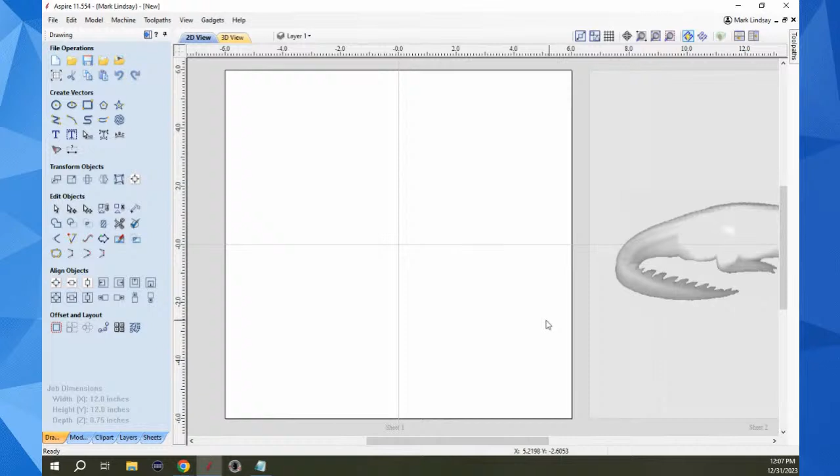I'm sure a lot of you who have done any kind of 3D work at all have already used a vector boundary when it comes to 3D.

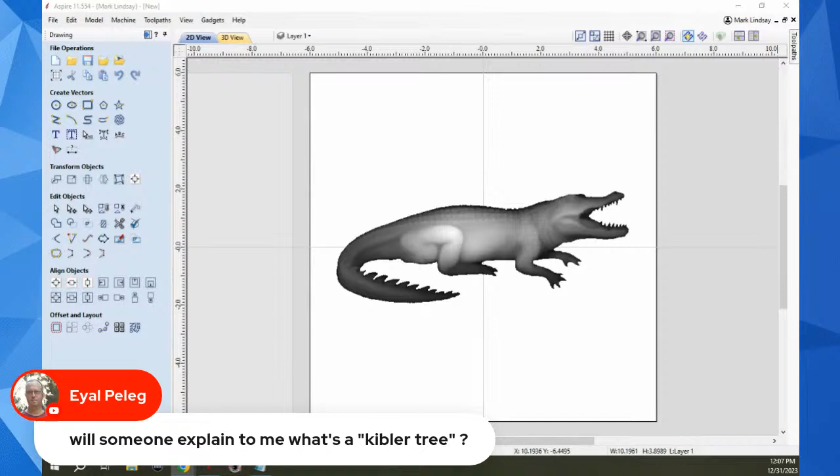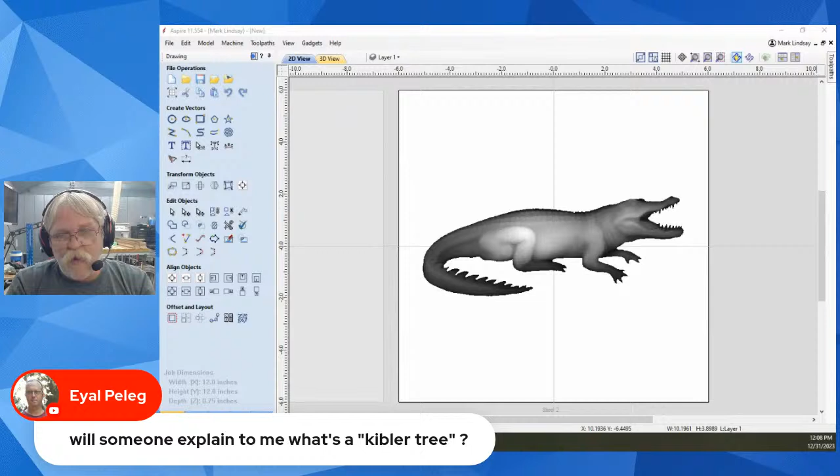Okay, let me stop for a second. Will someone explain to me what's a Keebler tree? Al, I sometimes forget we have people overseas or people not within the United States who aren't familiar with American slang. A Keebler tree - Keebler is a brand of baked goods here, cookies, donuts, crackers and things of that nature. The Keebler advertising is they're a bunch of elves who live in a hollow tree and bake all their goodies there, then put them out on the market for sale. Some of the emphasis in the Keebler elves is they're happy, friendly, efficient, and their stuff is good and good for you. How much of that is true, I don't know. But saying somebody runs a tidy little Keebler tree is using it as a euphemism for someone who runs a very tidy ship and is very competent and knows what they're doing.

I'll stop using that, but it is a fact. So, what can I say? Okay, into vector boundaries. Most times we use vector boundaries, and the only time I've ever seen them mentioned is when it comes to 3D projects like this. So I've got Wally the Gator out here in the middle of my material, and a vector boundary in this case is usually used to draw a vector all the way around the model to use as a machining limit. I only want to machine this, I don't want to machine anything out here.

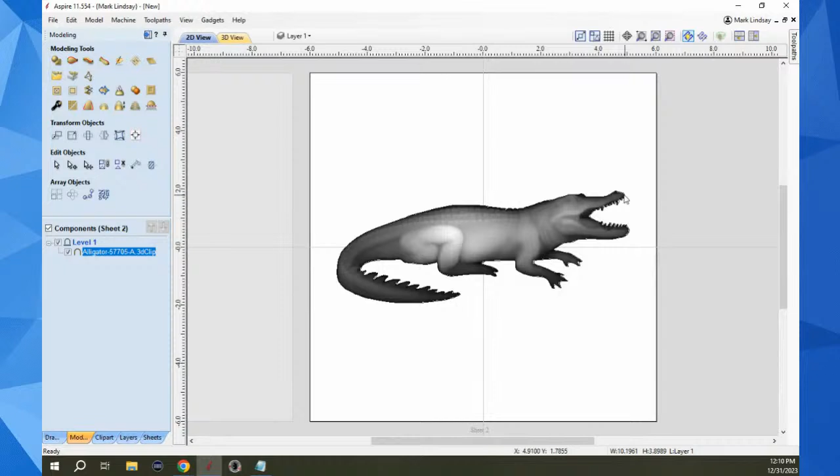And I don't want to add to the machining time by trying to machine the entire piece of material. So we'll go over to the modeling tab and make sure our model is selected. Then right here under modeling tools, we'll go down to the third row, fourth icon, and it says create a vector boundary around the selected component. I'll click that, and you'll notice a little bit of a jump over here. But what's actually happened is a vector has been drawn around that model.

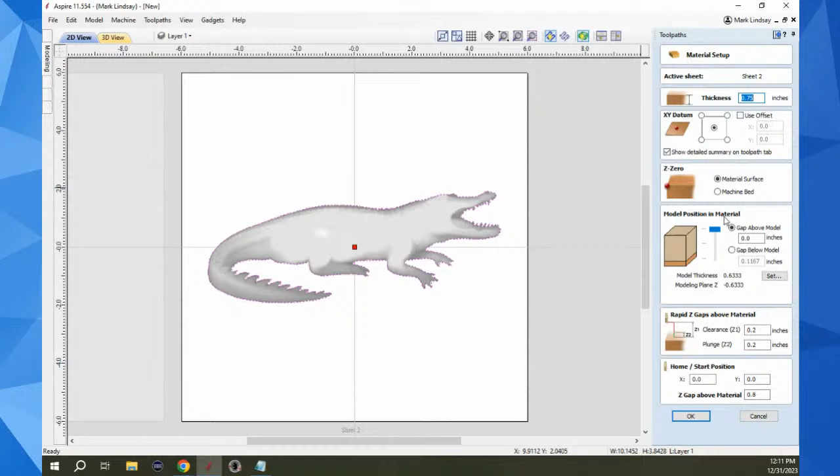And when we go over to calculate our roughing or finishing toolpath, we can set that. Let's go ahead and go over to 3D roughing. It's going to go into material setup - okay, all of that is good, all that's fine. When we go into our roughing toolpath, we'll machine to the selected vector and make sure that vector is selected. Then I'm not going to change anything else here, I'm just going to go ahead and take that as whatever it is.

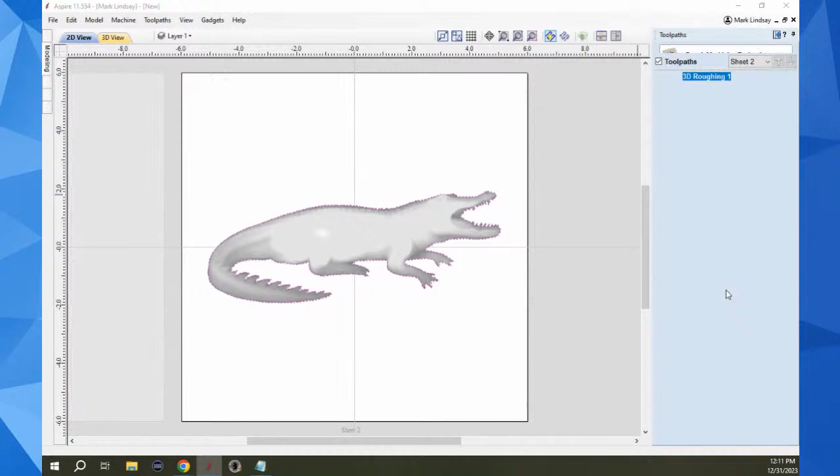And we can see that the only thing it's going to carve is right there around the model. It's not going to bother with anything out here. Now, I venture to say about 90% of you already knew this.

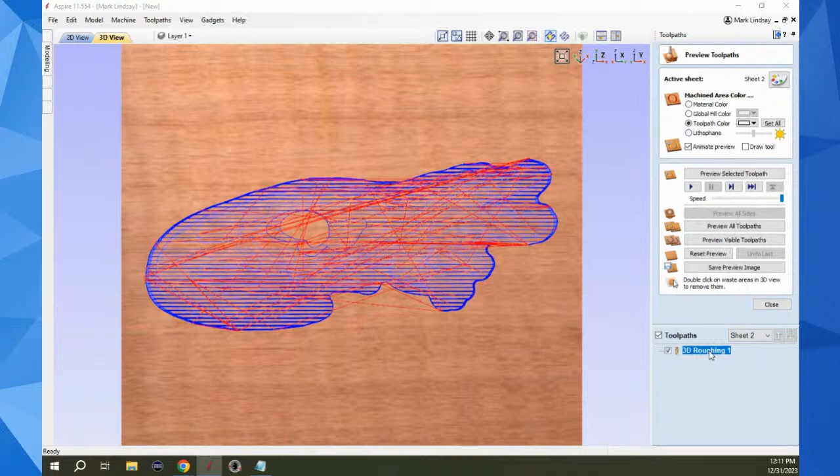But there are a few who might want to know that. Now, let's go back over here into, whoops, let me close this and uncheck that. Let's go back into the toolpath. We have several options here. We can do just the model boundary, meaning the entire alligator, but nothing else.

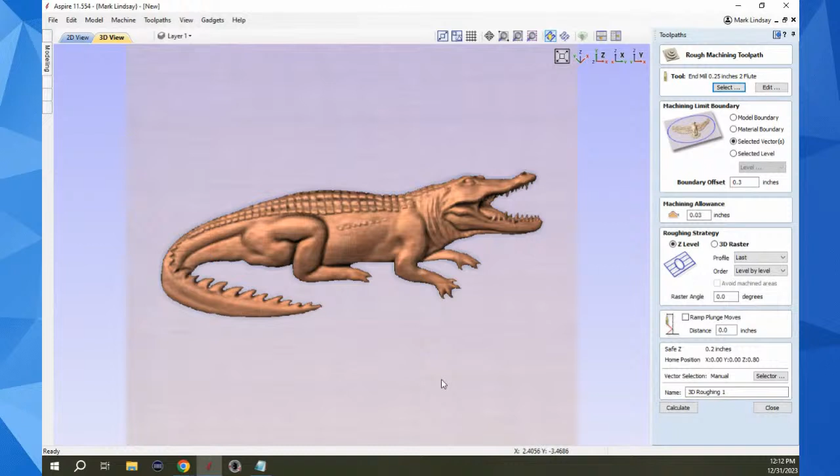But something to remember that a lot of folks forget is that if you have added a zero plane to your project, that zero plane is part of the model. And the zero plane is going to cover the entire surface of your material. Now, most commonly we'll use a zero plane if we're carving a dish.

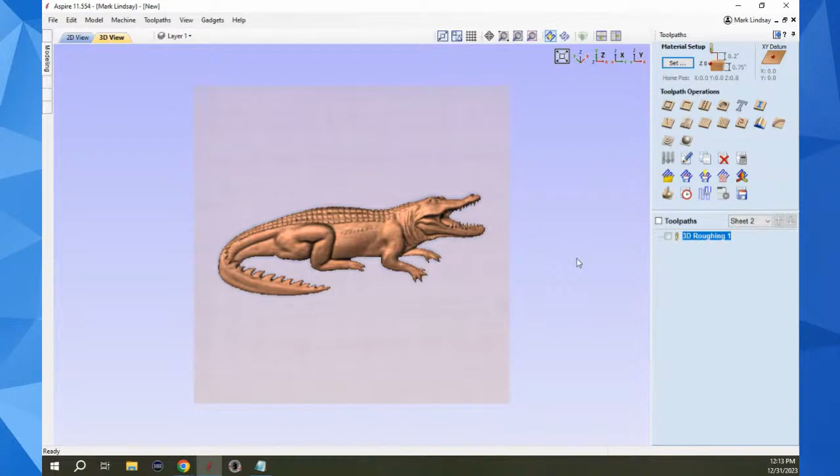So if you want to go ahead and carve all this here, you certainly can. You would just use the model boundary or the material boundary. But if you only want to carve this area right here, that's when you would use that selected vector. So vector boundaries around 3D objects are more or less pretty self-explanatory.

But something I have, and if you have any questions along the way, feel free to chime in and ask those questions. But something I have yet to see discussed really is over here in the drawing tab. If we come into edit objects, we go down to the third row, the fourth icon in, you can create a vector boundary around 2D vectors as well. And that's worthy of some exploration.

So let's say, for instance, you want to create a cover. You need to carve a cover to go over something. And you have holes that need to be drilled all the way through the material for some bolts or screws. And you need to draw that cover out. Now you've taken some measurements, and this is just an example. You know you need to do 1/4 inch holes or about 6 millimeter holes.

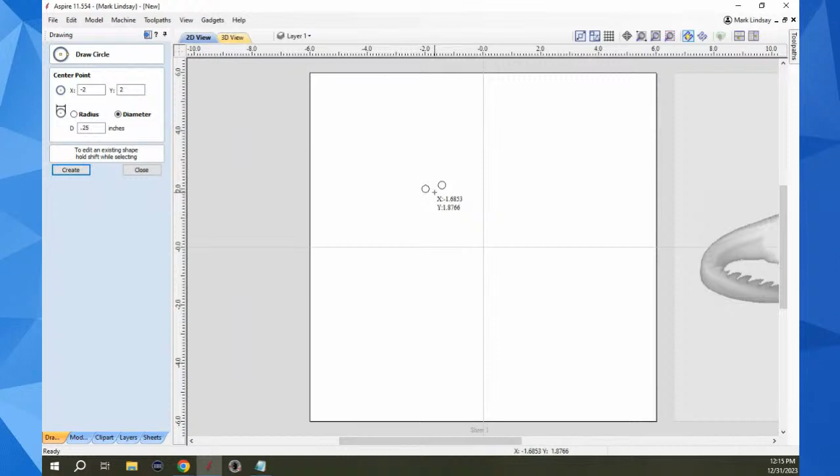Now we need another over here. The only thing that's going to change is I want it at +2 instead of -2. So I'm just putting the through holes in right now. And we'll go over there. All right. Well, if it's just a square cover panel that we're making, then this gets pretty easy.

We're going to go to -2 on my Y, +2 on X. That's going to put one down here. We'll create. Then I'll go to -2 over here. And that's going to put one on this corner over there. Create. Okay, pretty straightforward.

Now, we also need to counterbore. We want another circle around these that are 1/4 inch larger than these holes. We want to drop a washer down in there, and we need the heads of our bolts to be down below the surface of the material. Now, we could go in and draw bigger circles.

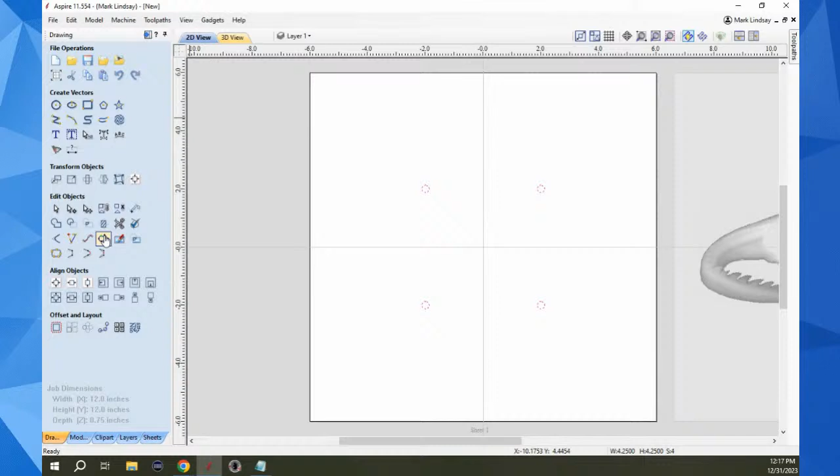We could go in and offset these, but there is another way, and that is we'll select all of our holes. Then we'll come over here to create a boundary vector around these selected vectors. So I'll click on that, and that opens up this form here, vector boundary. Now, what I want to do is an offset boundary around these circles. And I want it to be a total of 1/2 inch larger.

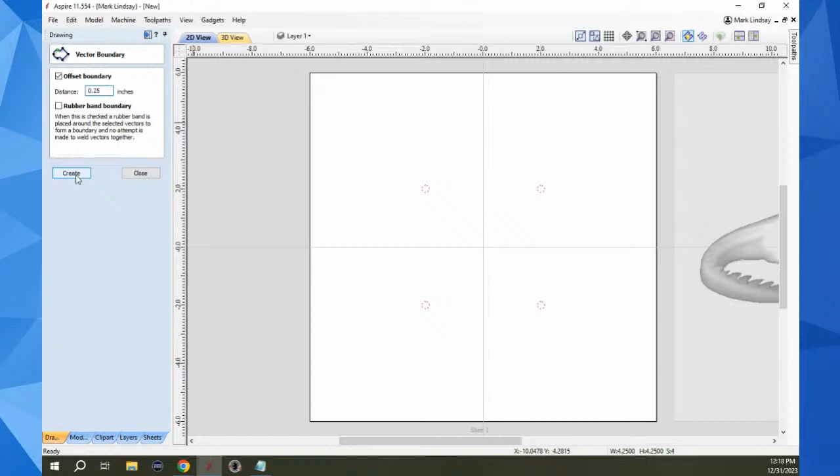Okay. So I'm going to go for a distance of 1/4 inch. And I put a second decimal in there, which Vectric does not like. And I'll go ahead and create an offset boundary around those 4 screw holes. Okay. Let me zoom in a little bit here, and I'm going to come to my measure tool. So I now have a counterbore, and I'll measure the distance from there to there, and we see that that is 1/4 inch larger all the way around. Okay.

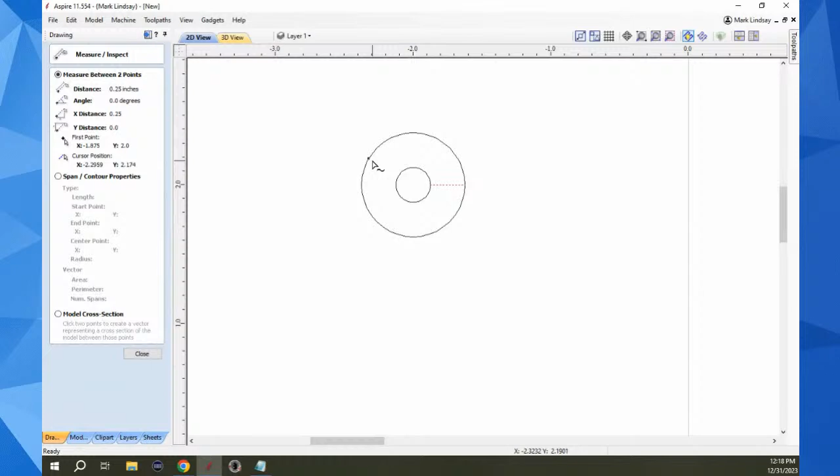Now, Bull is asking, what's the difference between a boundary offset and the offset tool, or is there? Well, I'm getting ready to show you. Okay. I'll show you the main difference, because yes, you're absolutely right. You could simply choose these 4 circles and offset them individually. Here's where the cool part comes in.

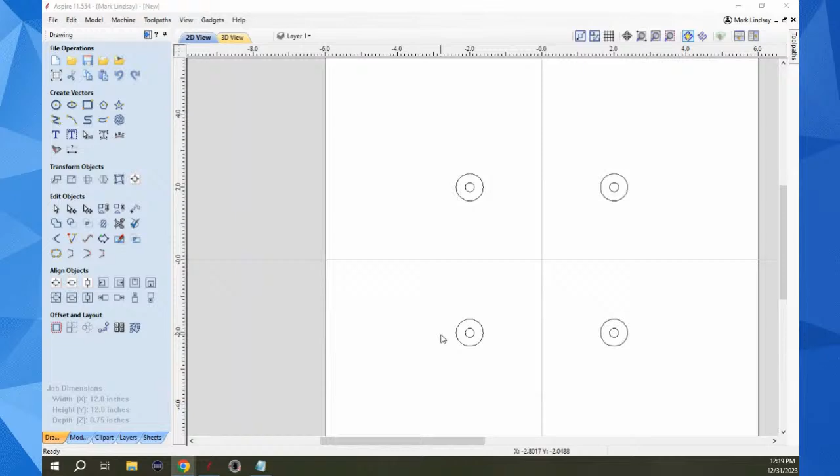So now for the size of your panel, the panel itself, you need it to be 1/4 inch larger than the outside of these 4 circles here. You need a 1/4 inch border, and you want to draw a vector around the outside, and you want rounded corners that kind of matches this radius. So what you'll do is you'll select these here, and I'm just holding down Shift and selecting each one. We'll go back up here to draw a vector boundary around the selected vectors.

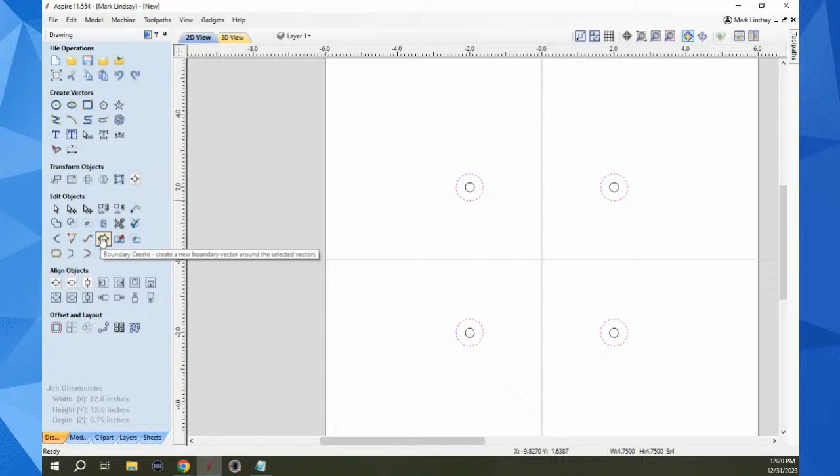Now we still want an offset boundary. We still want a distance of 1/4 of an inch, but we want to draw a rubber band boundary around all 4 of these. And what that does is that will draw a vector around all 4 of these using the same radius, and it will make no attempt to weld these vectors together. It's not going to try to follow contours or anything. So if I go create, I now have my cover plate.

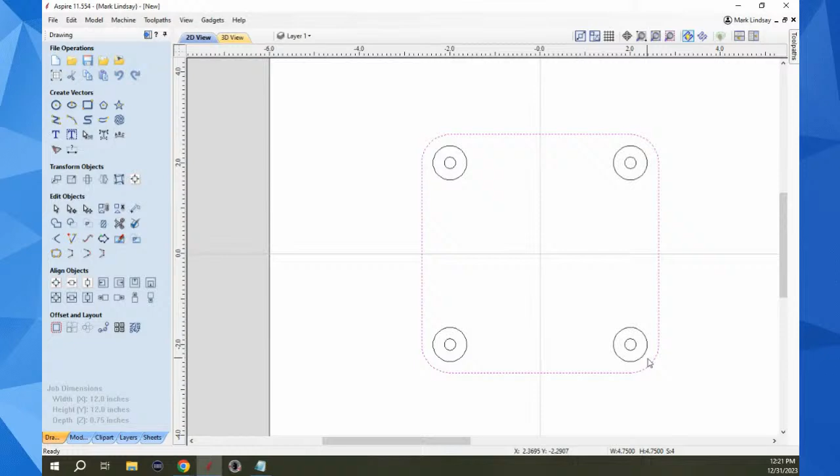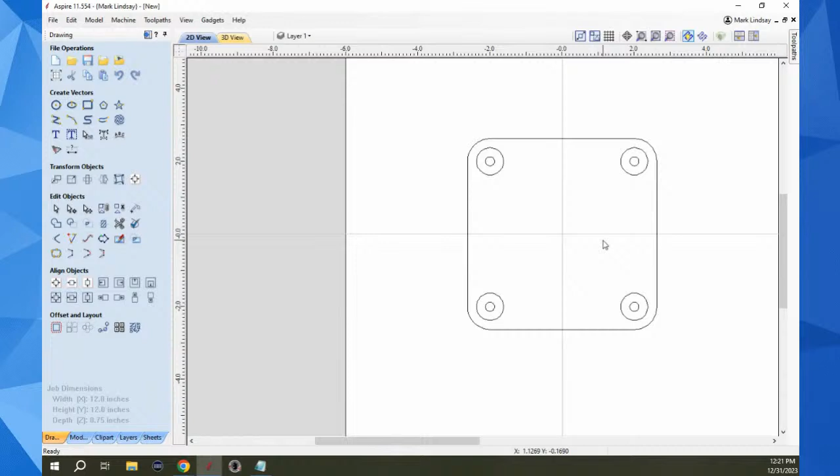The distance here to here is that 1/4 inch. Same here, same here, same here. Grab my measuring tool. Let's get in and let's make sure about this. And I'll just start right here, go to right here, and my distance is 1/4 of an inch. Okay. So let me undo that. Let me Control Z. I'll undo that.

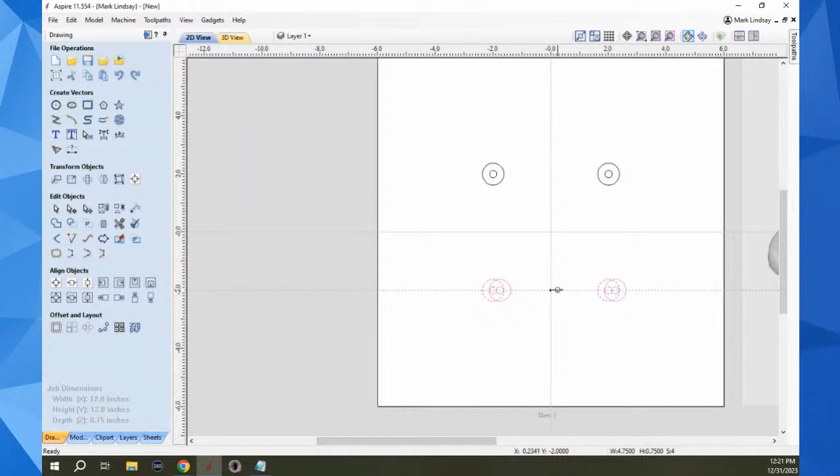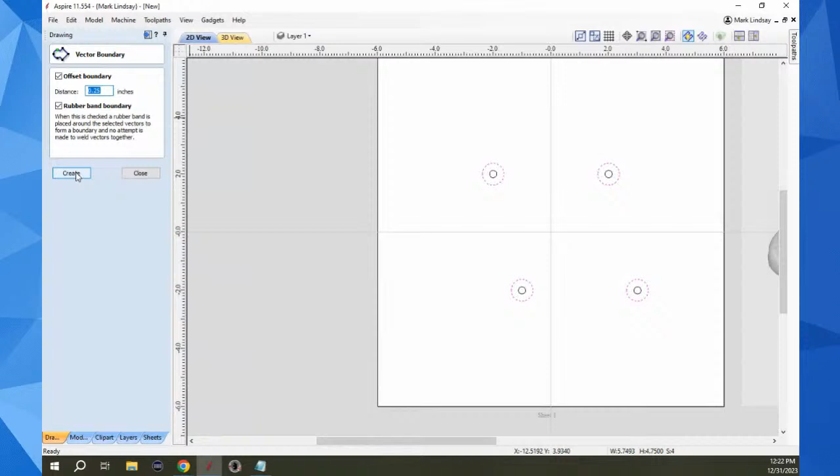And let's just say, for purposes of discussion, that we don't want a perfect square. That these two right here should actually be an inch over. So I'll go into Move Transform mode and I'll drag them over an inch. Now I'll select these outsides here. Again, Shift. This is just one example of how this can be used. Come back up to do a vector boundary. Again, I want an offset boundary of 1/4 of an inch, and I want a rubber band boundary. Then I'll create that vector boundary, and there is my cover plate.

Then I quickly discover that there's a bolt hole supposed to be down here. Well, oopsie. Let me select this bolt hole, put it into Move and Transform mode. I'll hold down the Control key, and I'll drag a copy. Let's base it off of the center on this one, and we'll put it right about there. And I'll delete that boundary. So now I've got this weird looking pattern that I need.

I can still go back in here, and then I can start getting creative with it. I can still do a rubber band boundary and create that cover panel. There are all kinds of options. There are so many different permutations. I don't like this diagonal line. I'm going to fix that. So I'll Control Z to undo that.

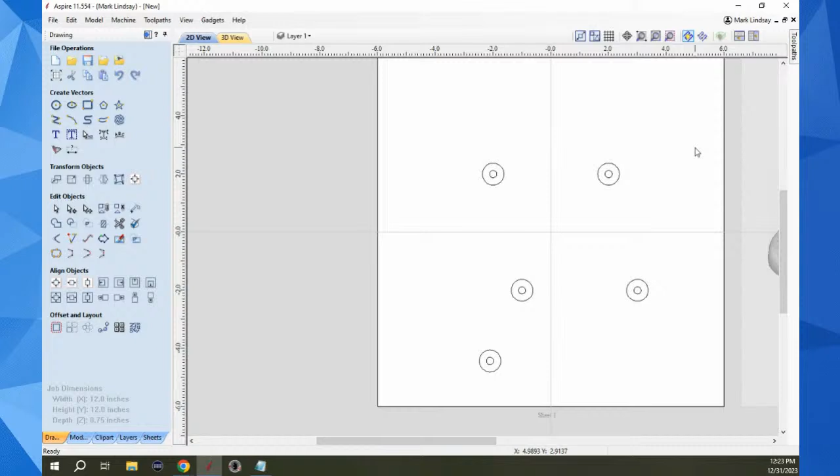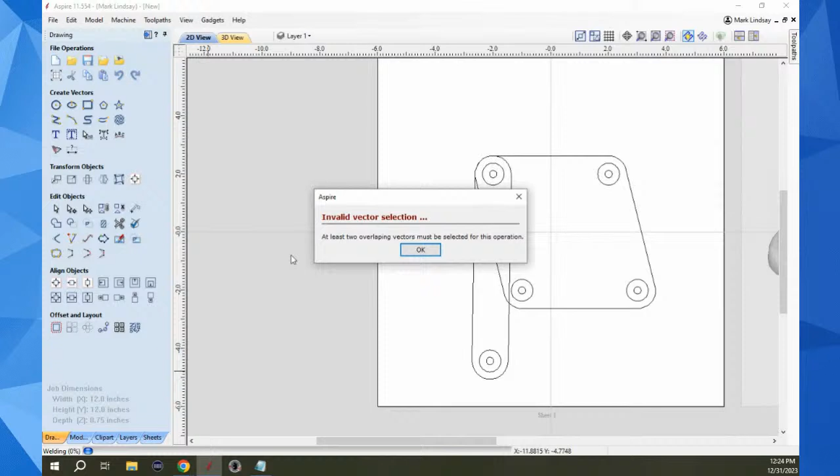And what I'll do instead is I'm going to just select those 4, do a rubber band boundary around those, create, okay. Then I'm going to select these and do another rubber band boundary around those, close. Now I'll select these 2 and weld them together. Fillet, oh, nope, wrong one. I chose the fillet tool. There's weld. I got to select the vectors, Mark. All right, let's weld those. Let's try this a 3rd time. Boom.

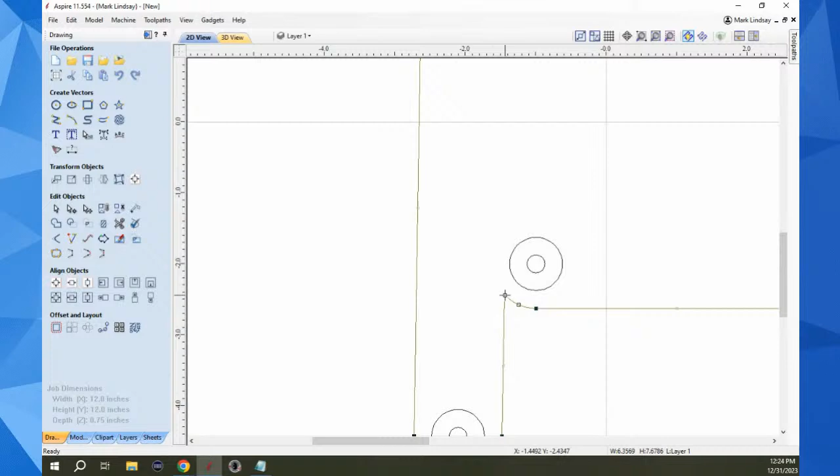Okay. Well, that looks a little strange. I got this little cutout here, but I can fix that. I can go into node editing. Now, first let's make this a line. There we go. Now I can drag this down to where that's 90 degrees right there, delete that point because I no longer need it. Come out of node editing. Now I can do a fillet. And boom, there we go.

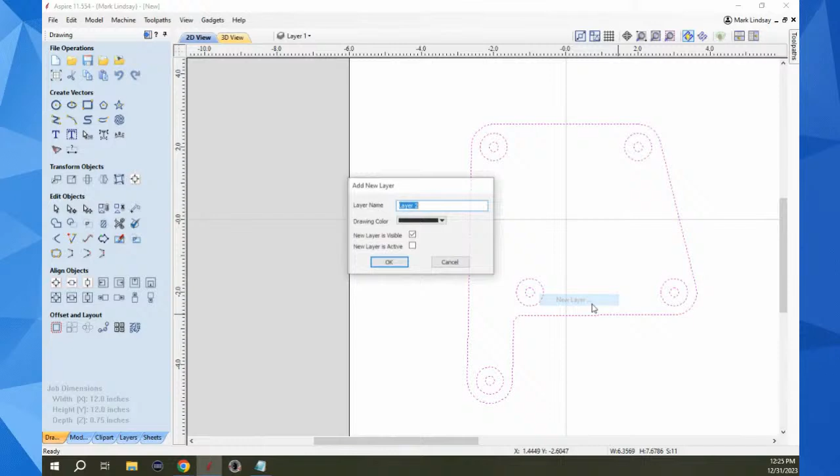There are all kinds of examples where doing something like this will work out. There are all kinds of situations where something like this could be used. Let me go ahead and select this, put it on a new layer. And I'll keep layer 2, and I don't want it visible. There, it's not restricted to closed vectors. It can be done in many different ways.

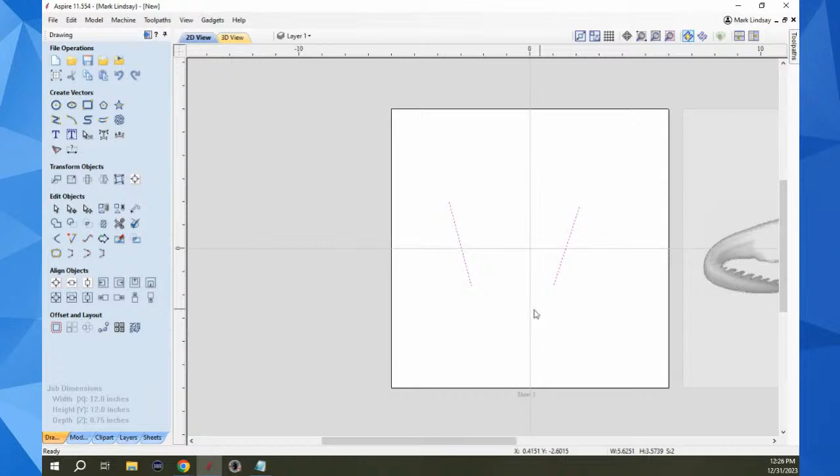Let's say you have a line here, and we have a line here. Now, these angles aren't anything special, they're just a couple of arbitrary angles. But now I want to draw a vector boundary around that. I can come back over here for the vector boundary, and I can turn off rubber band, and I can create a closed vector around those two open vectors.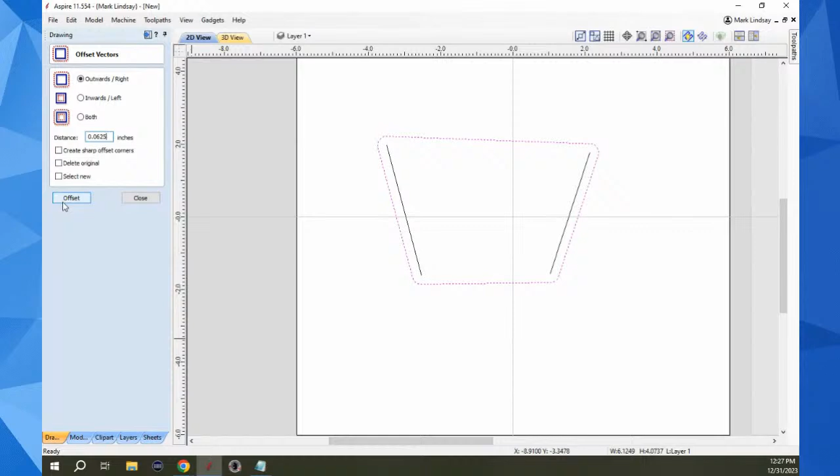Or, Control Z, I can do a rubber band boundary around just those two vectors right there. And there's my shape. And that can be offset and used for V-carving. I can offset that. Let's go ahead and do that. I'll offset it outward. Let's go with a 1/16 of an inch and offset that outwards. And there are two vectors that I can V-carve in between.

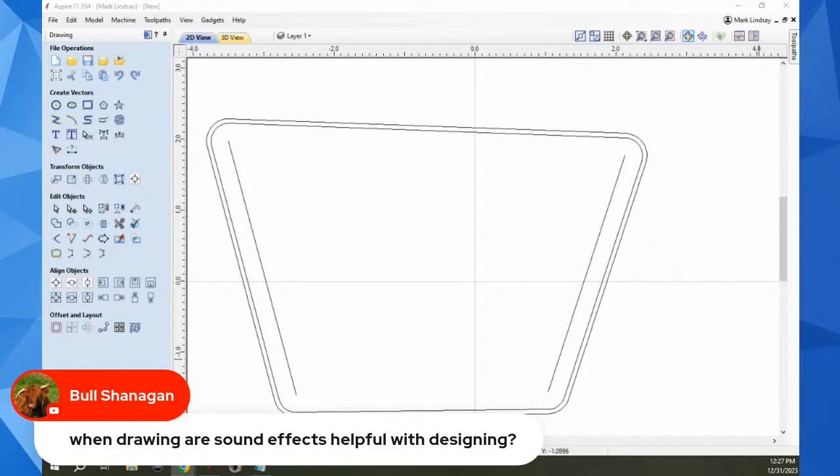Now, when drawing, are sound effects helpful with designing? I find they are for me. I sound like a pinball machine or a popcorn popper while I'm designing and drawing. Bada boom, bada bing, pow pow, bang, whatever. The important thing is you have fun.

And you can get all kinds of different shapes and designs and sizes when you're doing this. It's a cliche to say it, but the limit is your imagination. Now, it's not applicable in every case. Sometimes, for instance, that cover that I was just talking about, maybe the outline of that cover is the most important thing. And then you have to come back in with all the various measurements.

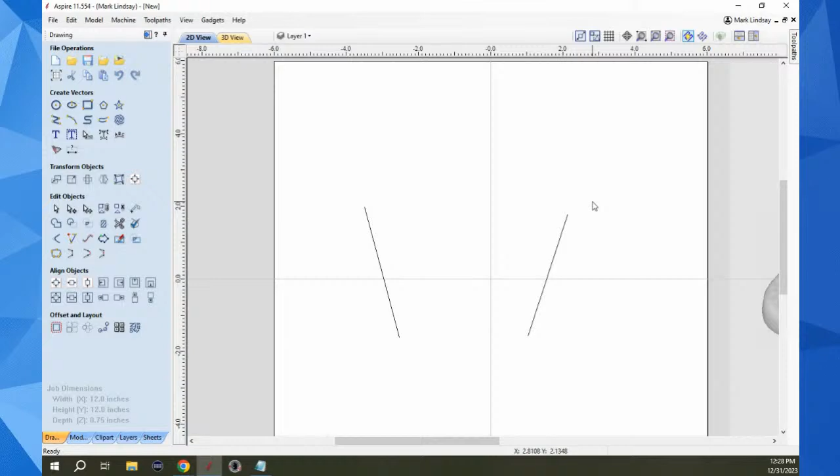But if you're creating a project and certain elements are the focal points or the features of that project, like these, it's more important that these through holes and these recesses be in these places, and the outline shape doesn't really matter. Well, then it's a viable option. So we would take this over.

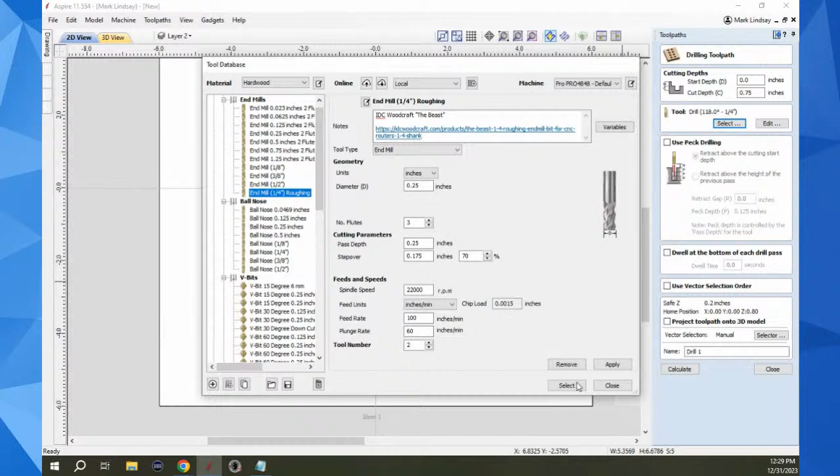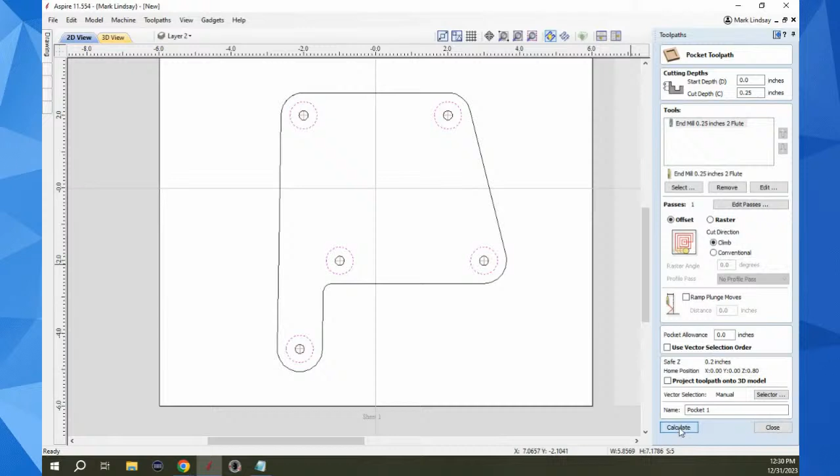Now I'll select the outside vectors. I probably should have grouped these so I would only have to select one, but what fun would that be? And now for this pocket, let's go with a 1/4 of an inch. That's fine. About 6 millimeters roughly. I want to remove that bit because it's just not necessary. And I'm going to offset these because it is a round vector. And we'll calculate those. And I'm not going to preview just yet.

I'll go over here and select this. For that, I'll do a profile toolpath. I'm going to cut all the way through the material. I'm going to edit passes for purpose of this demonstration. I'll do it in one pass. I would not do that, but for this demonstration, we don't want to watch a bit go round in a circle. There we go. And this is good enough. I won't add tabs for purposes of this demonstration.

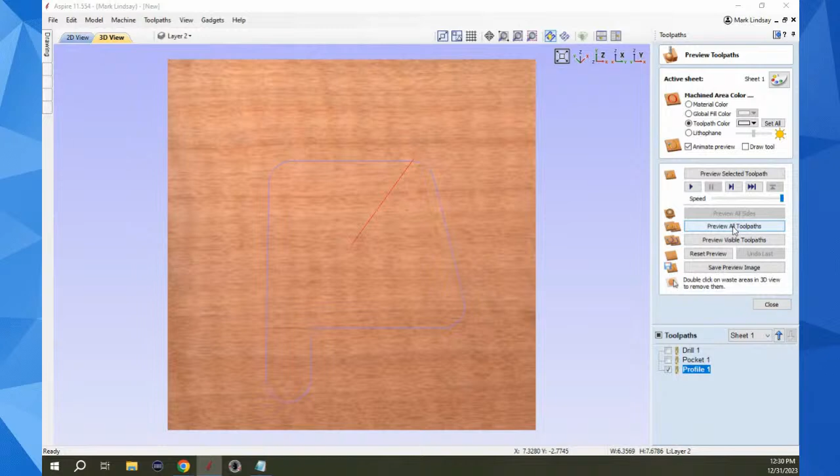Calculate, and now when I preview all of the toolpaths, get rid of the waste, we see I've got my little cover panel with the through holes, with the counterbore that's going to recess that washer and that bolt head, and then my profile cutout is self-explanatory. But it literally takes longer to explain this than it does to actually do it.

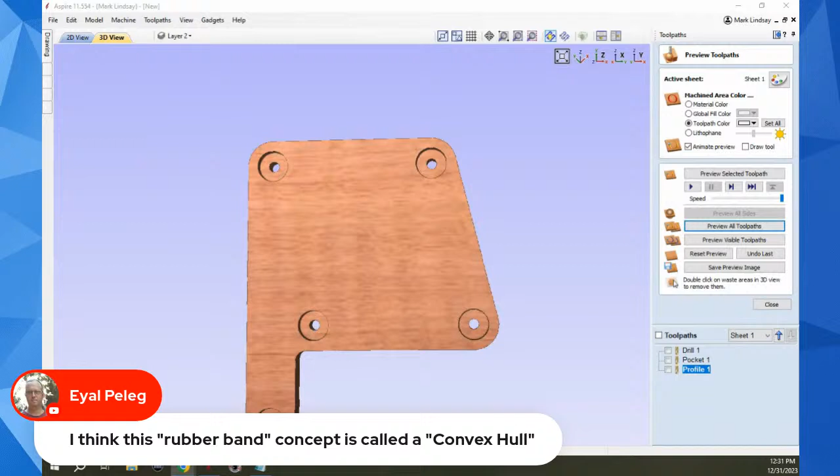Eyal says, I think this rubber band concept is called a convex hull. It may be. I'm not really familiar with a convex hull, but okay, I learned it when I was modeling using OpenSCAD. Okay, all right, yeah. I hesitate to say that there's no standardization in terms because we all know that there is, but some of these terms are regional.

Woodworking is pretty universal, and I'm just speaking about general woodworking now. But you have, for instance, the difference between a rabbet here in the US and a rebate in other English speaking countries. Then we call it a planer and you call it a thicknesser. We call it a jointer and you call it a planer. Both, I think, are correct and both make perfect sense. It's just a regional difference in the language.

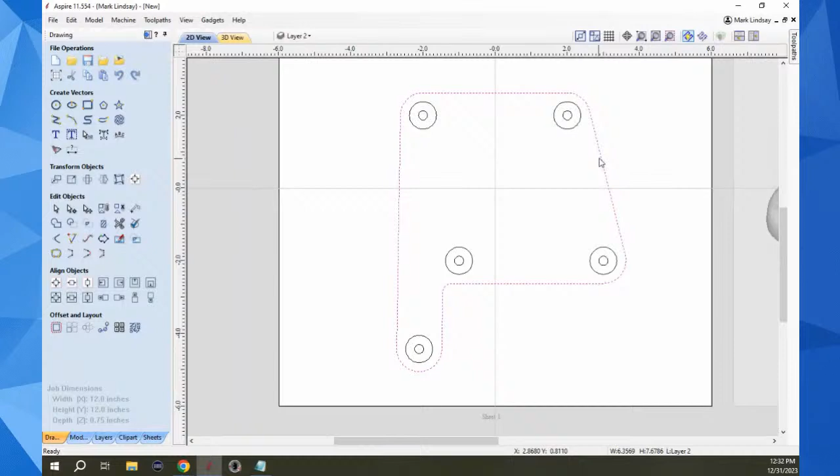I'm sitting here gesticulating with my hands as if you could see. But basically, the rubber band nickname comes from it following the trajectory of whatever it is you're trying to surround, whatever you're trying to offset. But it's maintaining that distance, that offset amount that you entered, that offset boundary, it's maintaining that distance.

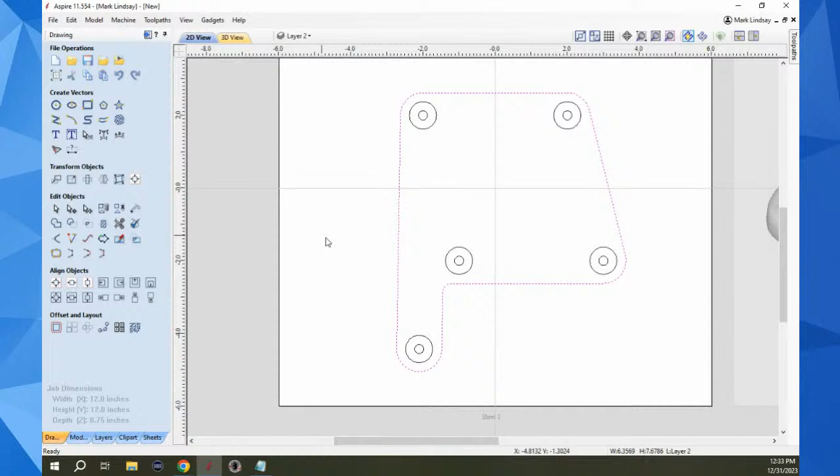So now, yes, it would be very easy to do the math and say, okay, I want it to be a 1/4 inch away over here. I want it to be a 1/4 inch away over here. I could make this out of 2 rectangles. I could make it out of 1 and just add a bunch of nodes. Or you could just select them all, do some welding, do a little bit of node editing and be finished with it. It eliminates a lot of math that maybe you don't need.

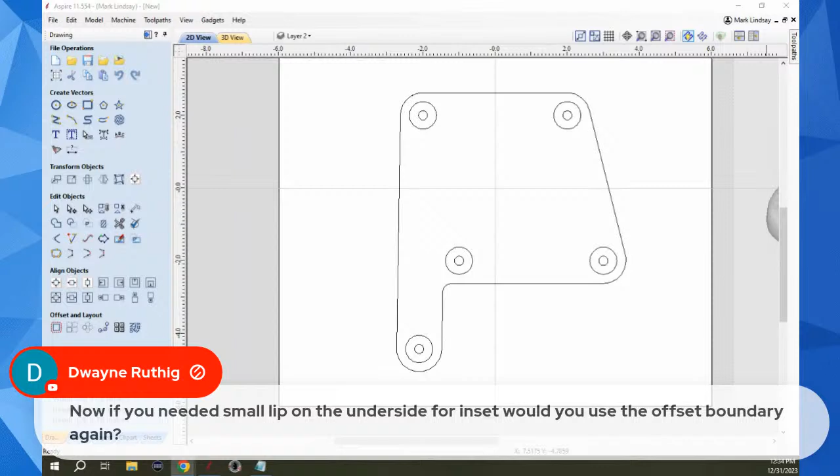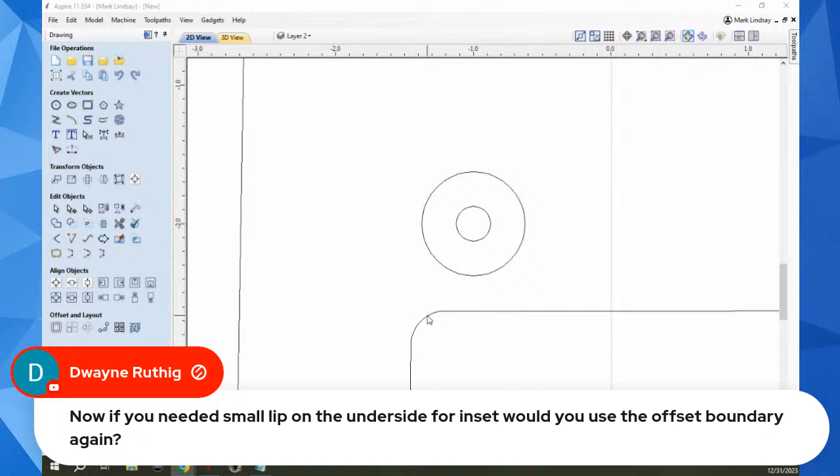Let's see. And now Dwayne says, now if you needed a small lip on the underside for inset, would you use the offset boundary again? You certainly could. Are you talking about a small lip inside? Or are you talking about, oops, I'm pointing at the wrong screen here. Are you talking about inside of the profile or are you talking about one of these counter bores? Because both of them could be done.

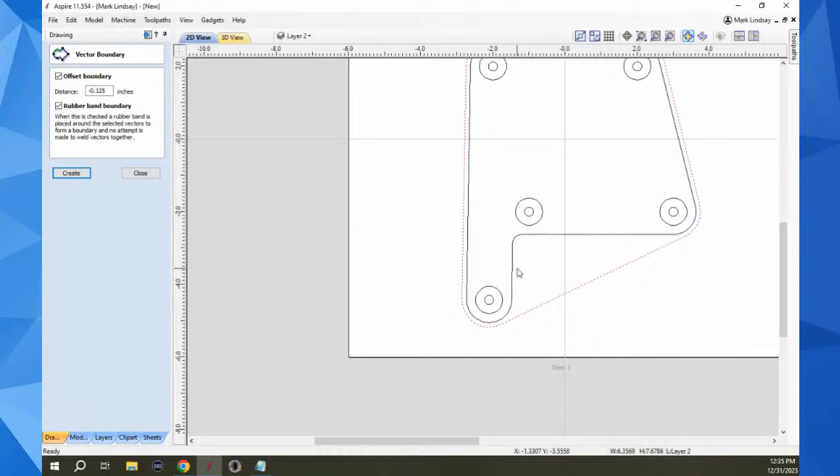You could, let's see, select this, do a boundary offset, and let's say I wanted to come in 1/8 of an inch. I could come in 125 and we'll make that negative 125, a rubber band boundary. And because I made the modification to it, it didn't follow this contour. This is a time where using, let's close and Control Z this, if you needed that offset inwards, you would want to use this offset.

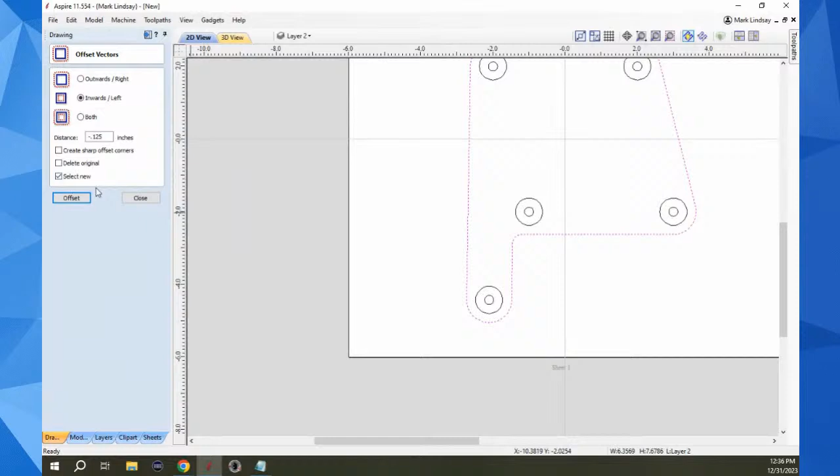Okay, you would want to go inwards, negative 0.125, because, and Bull, as part of your question, this is where the offset would follow this contour, where the rubber band border would not, or vector boundary would not. So I don't think we have any sharp corners. Don't need to delete the original. We'll go ahead and select new, and we're doing an offset. There we go.

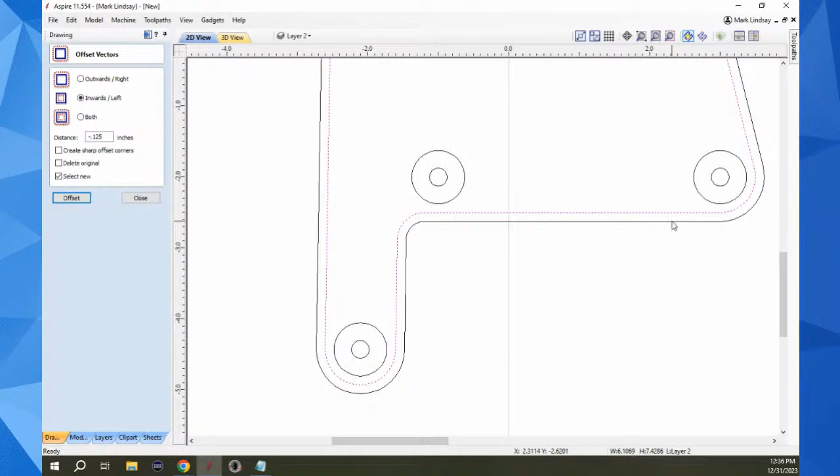So now you could use these two. You could either pocket that or do another profile cut here with, let's say, a 1/8 inch deep profile. So the rubber band offset boundary here will not follow the contours of this profile. It will simply draw a vector all the way around.

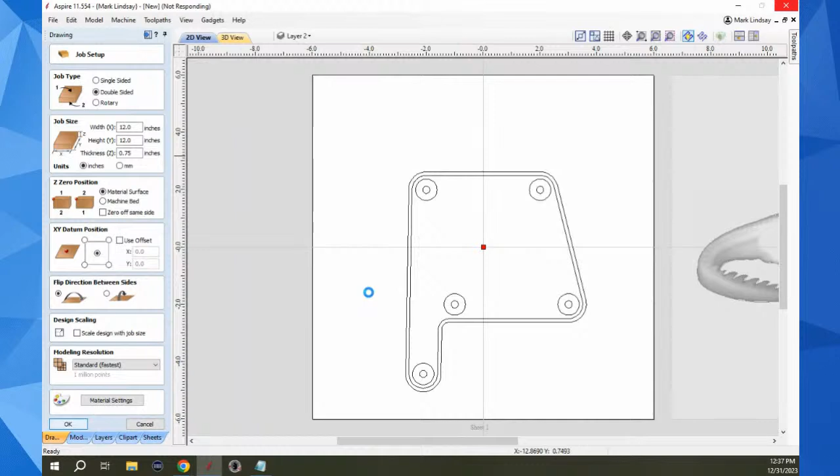So, okay, undercut on a two-sided project. All right. What you could do for that, well, there you go. You've drawn this. I would do this as well. I would probably copy both of these. I don't have a double-sided project in my job setup. So let's make this double-sided. Okay. I say okay. The computer is, there we go. All right. I would probably select both of these and copy to other side. That way you have them there on the bottom. Then you could do your undercut.

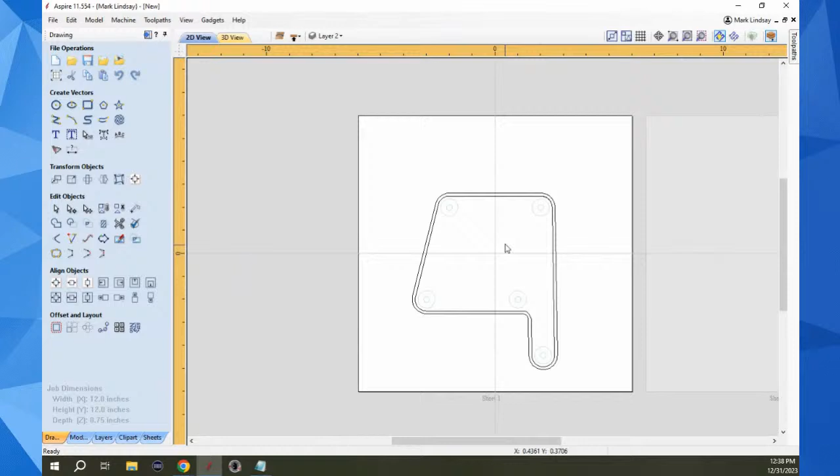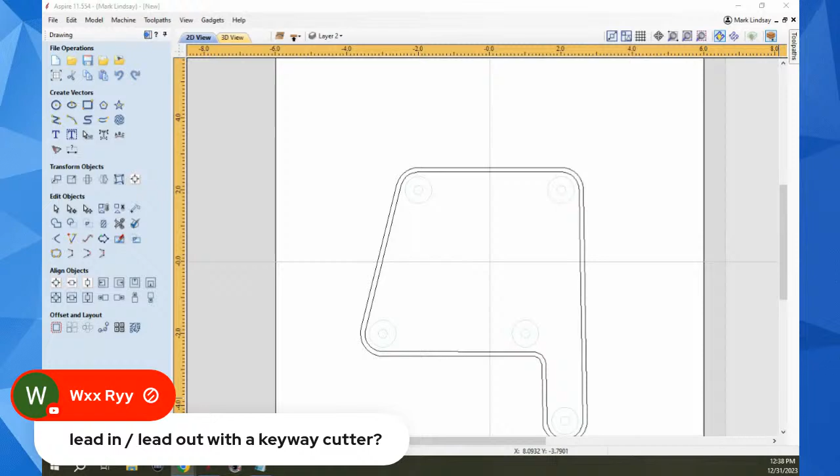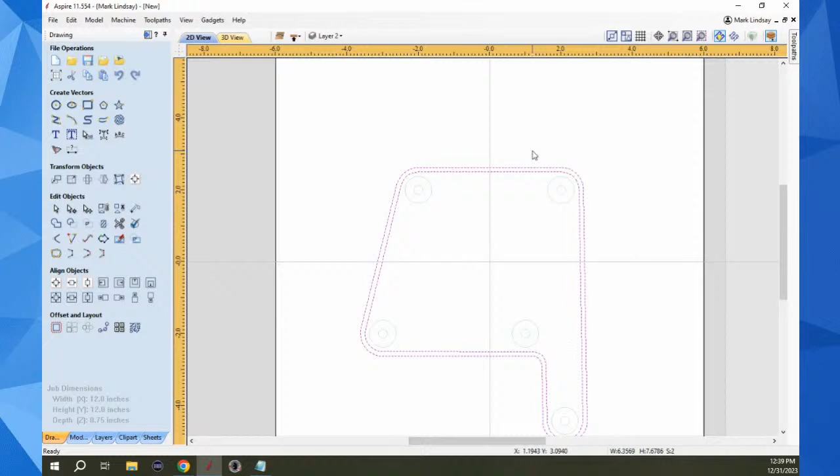And personally, on a two-sided project, I tend to do my outside profile on the bottom. So, yes, Wendell, you could do a lead in and lead out with a keyway cutter, and that would make it a single-sided project. You could do that. Depending upon the thickness of the material, you could probably get away with doing that with a keyhole bit. But again, depending upon the thickness of the material and your keyhole bit. But yeah, on a two-sided project, I would probably do these two machining operations last on the bottom side.

You know, to your point, Wendell, you could do the keyway cutter, but for example, if you had artwork or something else that needed to be put here, you could do this in conjunction with all that other artwork. Say you wanted to put your logo on the inside of this, you could carve your logo in this, swap out for an end mill, then cut your recess here, your undercut, then do your profile. So yeah, there are many, many options.

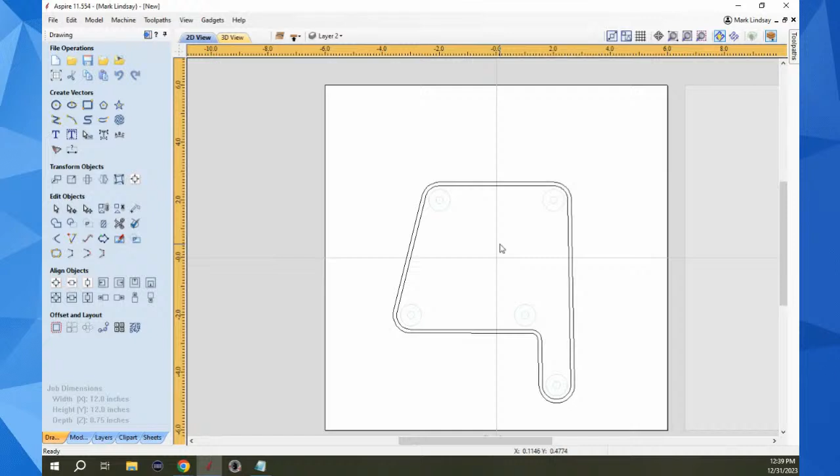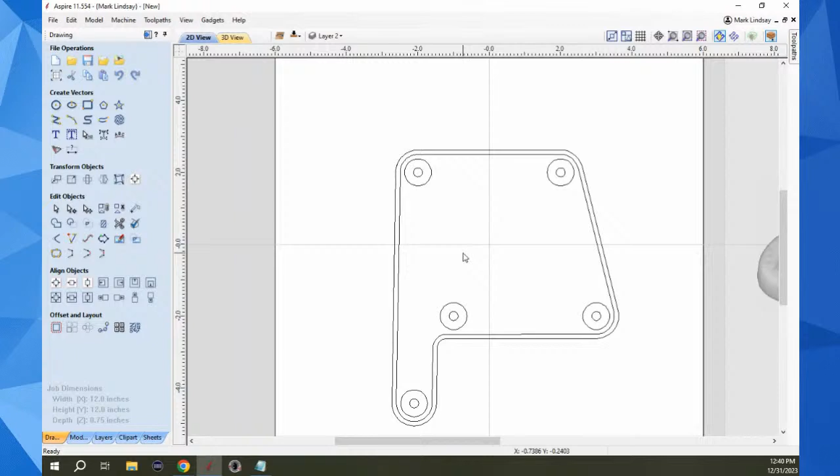So, this whole thing about using the vector boundary kind of came about by accident, but I can't recall, maybe you can correct me if I'm wrong out there, ever seeing this explained in any of the training videos. And for the life of me, I can't figure out why, because it is something that would have come in handy on a lot of different things that I was trying to design. So get in and play with it, have some fun with it. It opens up a lot of possibilities, and it just makes things easier, eliminates a lot of math.

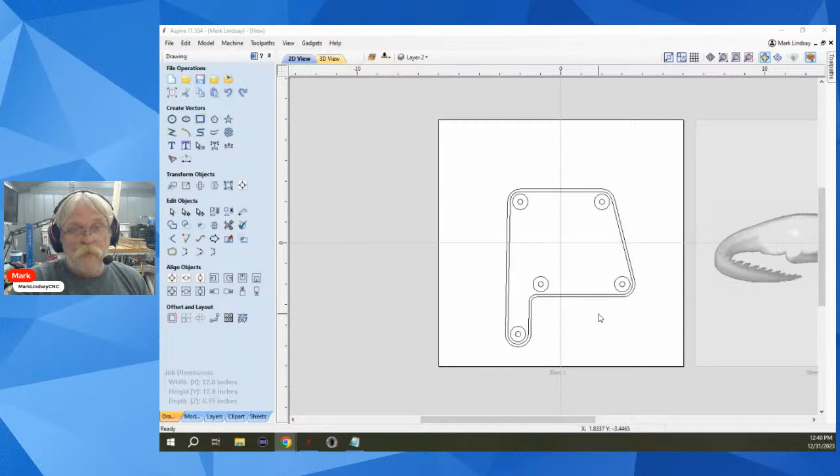So let's get to some of your questions here. And if anybody has any questions on anything we've talked about, by all means, put them in the chat.

So, in no particular order, John Parker says, "What type of wood is that on your spoil board behind you, Mark?" Excuse me. If you're talking about that right there, that is part of a shipping crate that I got some parts in, and the top two pieces are white oak, and the rest of it is all pine, fir, cedar, something like that. So it's just some scrap material that I'll probably be using for prototyping or what have you. I've already got a bunch of it, but you know, free is always a good price.

That is XPS, extruded polystyrene. The white thing on top of it is a piece of HDPE. The white thing on top of that is a silicone mold. That is a cedar fence board, and underneath it is a piece of MDF that I'm going to be using for a sled, and that will be the next project. I've been saying that for months, but I do mean it. So, okay. Let's see.

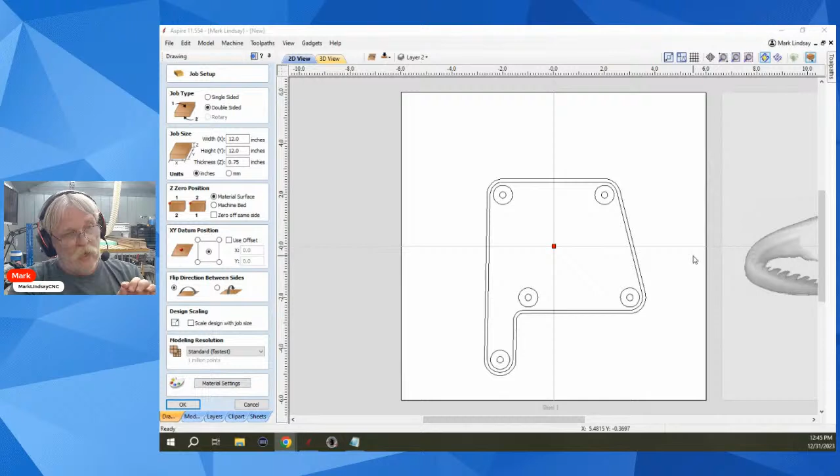So I have to remember when I flip my material out on the machine, I got to flip it side for side. Those alignment dowels will keep it all in alignment. It works, and it's worked every time I've used it. In fact, that's the only method I use. I know some people come up with elaborate jigs for holding onto materials, but even using those jigs, that relies on you making sure that that piece is absolutely perfectly square and that your design is perfectly centered. Because if it's off in any direction, your front side and your back side is not going to match up. So, it's something to be taken into consideration.

Now, using those alignment dowels, your piece of material doesn't have to be square at all. I've used cutouts from other projects that were of odd shapes and odd sizes. But once you set that XY0 for the top side, you don't change it. That's where the XY0 is going to be for the entire project. The only thing you'll change is your Z0. And again, I get into that in detail in the playlist.

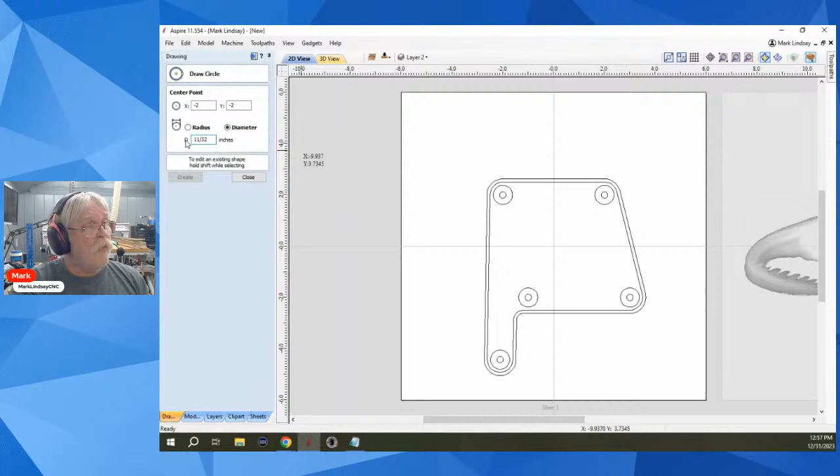Now, if I want that hole to be 11/32 in diameter, I can just go 11 divided by 32. Remember, that's what that line means, is divided by. So I have 11/32 there. I don't know what the decimal equivalent is. Type in equals, and there it is, 0.34375.

So I use the built-in calculators all the time, even when I don't necessarily need them. Even when I'm not necessarily working in Aspire. I've got Aspire open all the time, sometimes 4, 5, 6 projects at once. Now, Brooks and Mike Healey, you all make a good point.

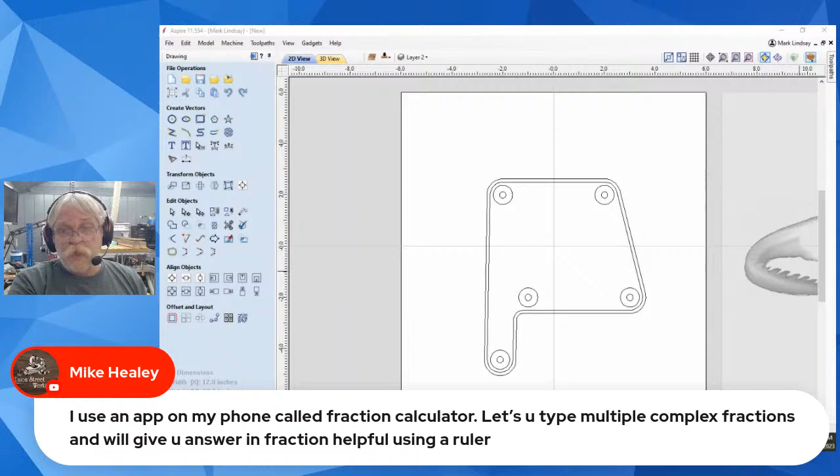Fraction calculator lets you type in multiple complex fractions and will give you an answer in fractions, helpful when using a ruler. Yeah, there are certain cases where that type of a calculator is very beneficial. I used to use a woodworker's calculator in the cabinet shop and the furniture shop, because when you have a whole bunch of different measurements, a calculator that will work in fractions, cumulatively speaking, comes in very, very handy.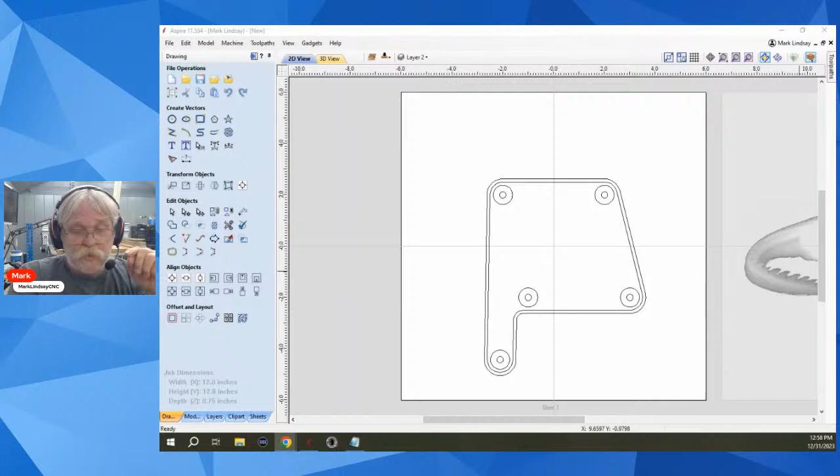Because you got to add 11 and 3/16 to 4 and 5/8 plus 2.5 plus 1 and a 16th. It gets real cumbersome after a while. You could do the math and convert all of those fractions to decimal, but if you got a calculator that'll do that for you, bingo. And they're not expensive. A lot of apps for your cell phone will do exactly the same thing, maybe for $1, might be free if you don't mind advertising. But a woodworker's calculator is a good investment no matter which way you go.

Now, this was back pre-internet, so we didn't have online calculators. But even something as simple as a Google search, Google has a lot of built-in calculators, and I use them all the time. That's how, when I'm talking to you folks here, that's how I know 5/1000ths of an inch is 0.127 millimeters. That's how I know a quarter of an inch is a little over 6 millimeters. I haven't got this memorized. I am totally dependent on calculators.

If I want to know what 60 inches per minute in millimeters per second, I just type that in and it tells me 25.4 millimeters per second. Google has a lot of built-in calculators.

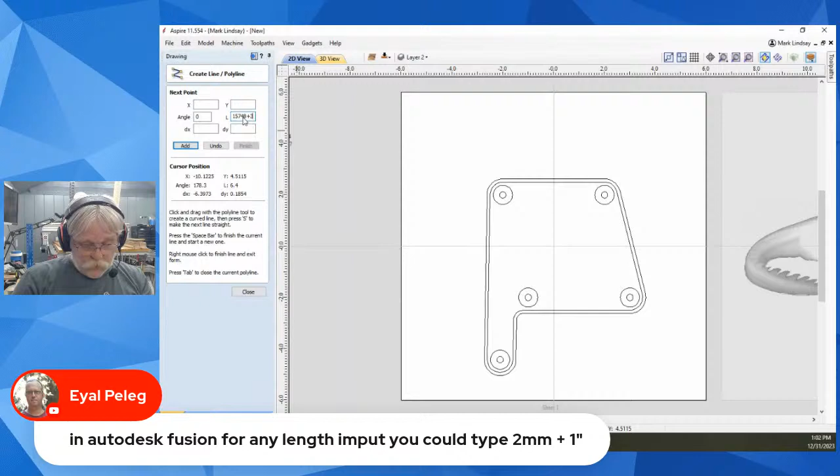So we'll add that, and there is my line. So there we go. Okay, well, we got down in the weeds on that one.

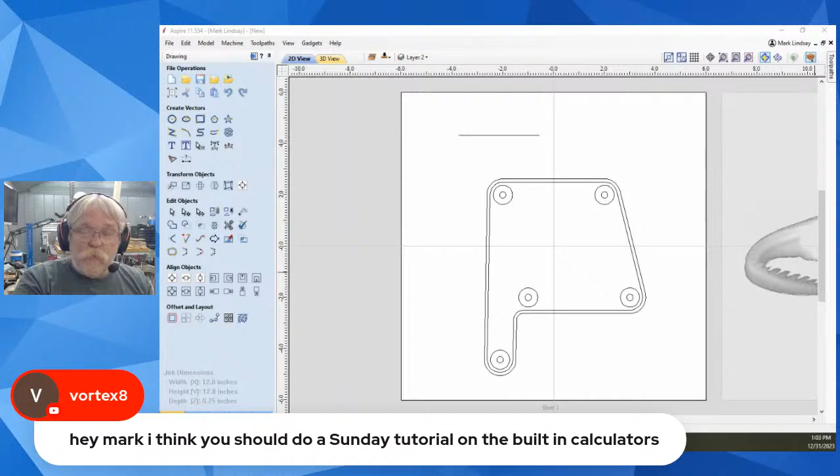Vortex says I think you should do a Sunday tutorial on the built-in calculators. I can do that. I have one video out, but it's really old - one of my first videos where I talked about converting from imperial to metric and metric to imperial. But it's one of the first videos I ever did, so you have to scroll way back. Yeah, point taken, I could do a tutorial on the built-in calculators.

And finally here, Brooks asks: my question is, how OCD should I get when sanding, say end grain? Can be tough to vanquish the ghosts.

Saving the best for last. This is a topic that is so subjective. I look at it this way, Brooks: if it's got my name on it, I want it to be as perfect as I can get it.

Having said that, style is also going to dictate a lot. If you want a rustic look, maybe you don't want to sand all that much. Maybe you want to leave some of those surface imperfections. Let's say you made an end grain cutting board and ran it through your drum sander, then got out your random orbit sander to clean it up - maybe you find some of the sanding scratches left by the drum sander to be acceptable. We all get off the elevator on our own floor. So what looks great to me may not look great to you.

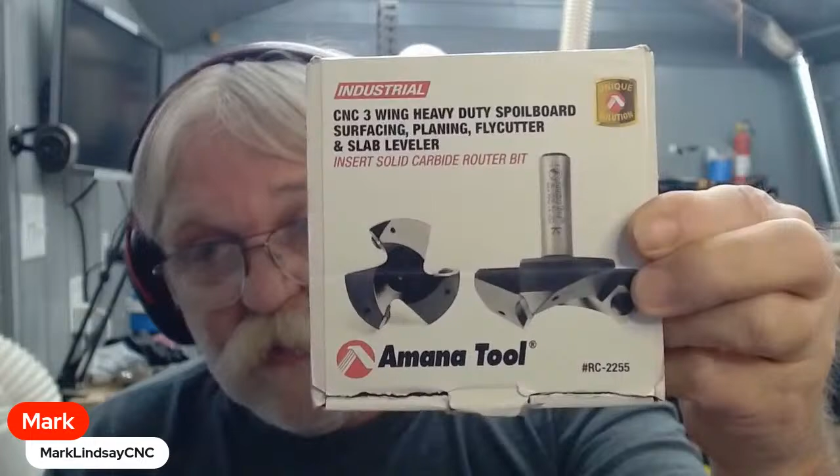It's not cheap, but it's worth it. I believe I did a short video on that Chaos end grain cutting board I made for Linda, and I used this bit to surface after all the glue ups were done. I used that bit to surface, and there was very, very little sanding to do on that end grain - it didn't even feel like end grain. Mount it to my table, surface it nice and flat, flip it over, surface the other side nice and flat. On the show side, I made my final surfacing pass of 5 thousandths deep, which is 0.127 millimeters - that's where that was coming in.

That little teeny tiny bit being shaved off by this surfacing bit - it took me maybe 15 minutes with the random orbit sander and 220 grit, and then another 10 minutes, probably closer to 5, with 320 grit, and that cutting board was ready for finish. Yeah, this is kind of using a Cadillac to haul manure.